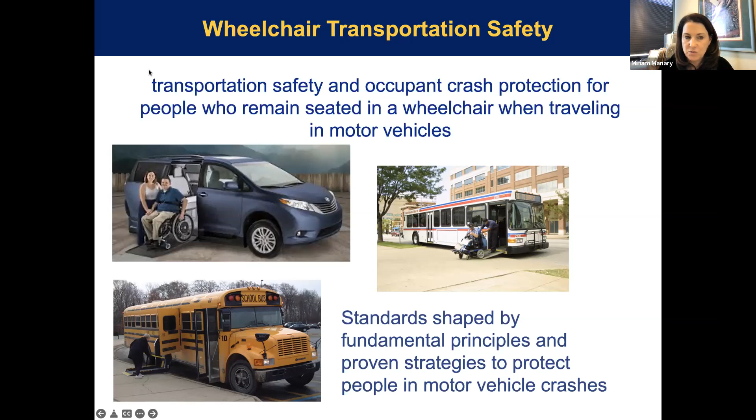When developing these standards, we leaned heavily on the precedents and the principles of conventional automotive safety standards. We looked to the federal motor vehicle safety standards to try to figure out what were the general principles and how can we adapt those to the situation where a person is seated in their wheelchair. So I want to start off by just listing the handful of fundamental principles, so hopefully you can see how they come through in the standards.

One of the main ideas is that when we look at motor vehicle crashes as a whole and the injuries and fatalities that happen as a result of them, the majority of these injuries and fatalities are a result of the occupant contacting something. So either they're contacting the vehicle interior or they've been ejected out of the vehicle and they're contacting an unfriendly surface outside the vehicle, like a tree or the ground. If we can keep people from hitting other objects in the vehicle, we're winning a big part of the game.

A second cause of serious injuries is misused or non-used seatbelts. Obviously non-used seatbelts leads back into the first one, where you're at risk of hitting things. But if you're not positioning the seatbelt appropriately, so it's loading parts of your body that can't take that high restraint force load, this can also be a cause of injury.

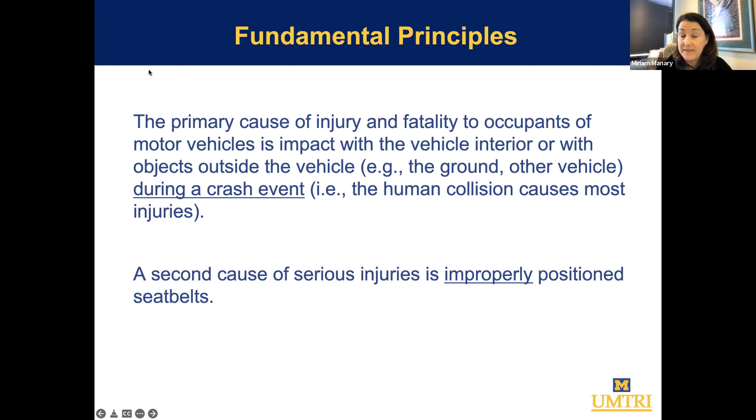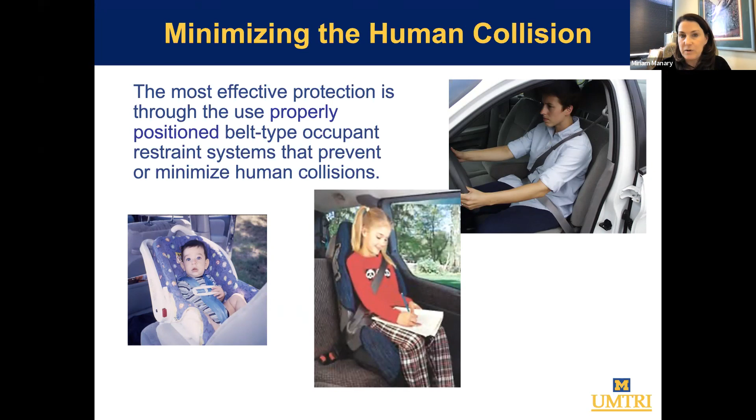So we're all about minimizing the human collision, and it's not a super sexy idea, but the most effective occupant protection system for automobiles is the seatbelt. You can see pictures here of people properly wearing their seatbelt or kids in child safety seats. But this is the sort of protection that really is the best that we have to offer right now, and certainly the level of protection we want to offer all of the occupants of the vehicle.

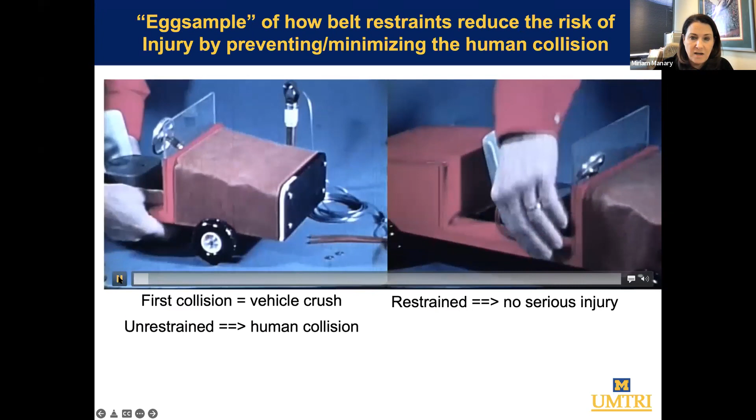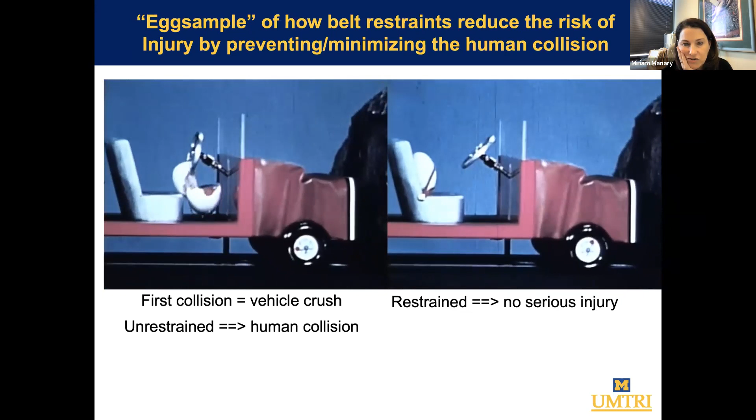This is just a little video that shows the importance of minimizing collision, a simple comparison of these little toy cars. One of them will have an egg wearing a seatbelt and the other has an egg not wearing a seatbelt, and you'll see just that simple little strap keeps the egg from contacting the unfriendly structure and keeps them intact. So a visual to go with that idea of not wanting to hit other things in the vehicle.

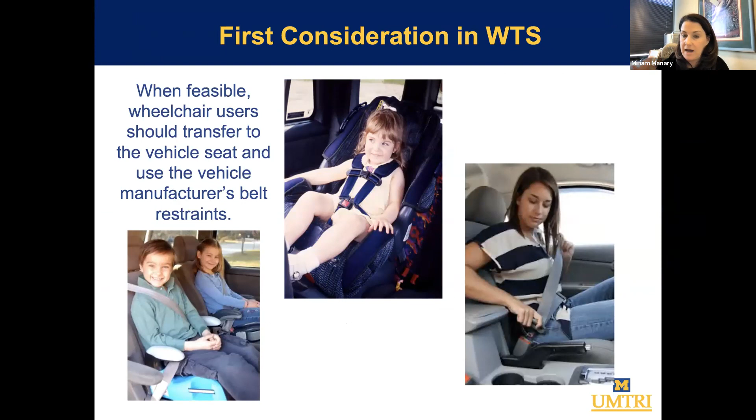That being said, the first choice for people who are in wheelchairs is to transfer to conventional vehicle seating or a child safety seat and use the occupant restraint system offered by the vehicle. But we know that for some wheelchair users, it's just not feasible to transfer, or it's unsafe, or it puts them in a situation where their medical needs can't be met.

So for people who are going to stay in the wheelchair, all of a sudden we want that wheelchair to have a lot of characteristics of a vehicle seat. We want it securely anchored to the floor. We want it not to interfere with our lap and shoulder belt fit. So all of a sudden we're asking the wheelchair to do a whole other set of functions beyond all the great functions that it already does. Both of these goals, having a well-secured wheelchair and having a good fit of the occupant protection system, are much easier to achieve if you have a wheelchair that has been designed for this purpose.

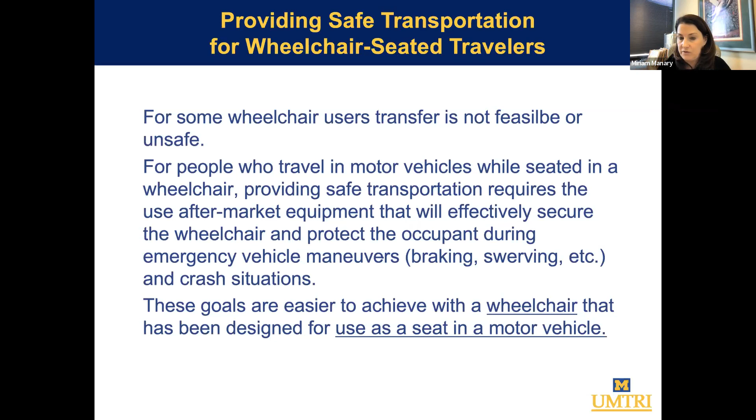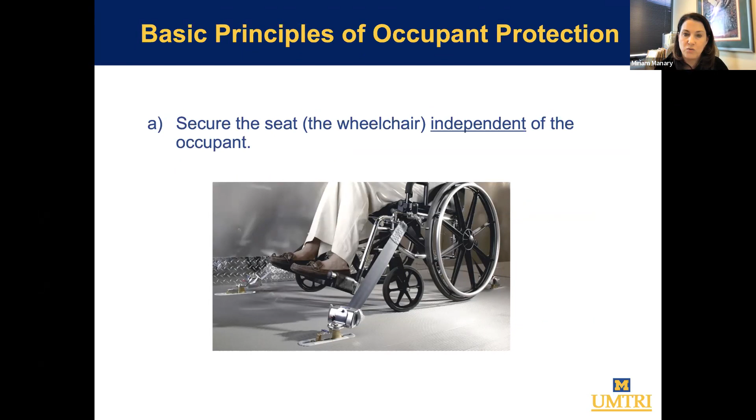So there's 5 basic principles. One is that we want to secure the seat, in this case the wheelchair, independent of the occupant. We don't want the wheelchair to load the occupant and increase crash loading.

We want to orient wheelchairs facing forward in the vehicle, especially in small vehicles. I will talk about the one exception. It used to be very common for people to line or load wheelchairs sideways. That is, none of our crash testing and the way that we know how to protect people is coherent with having people ride side-facing.

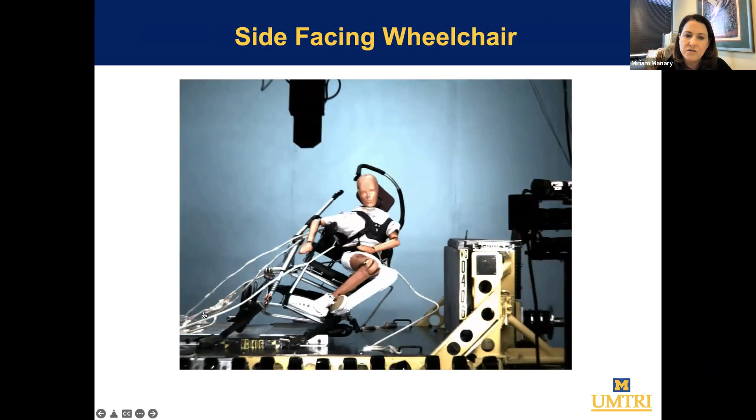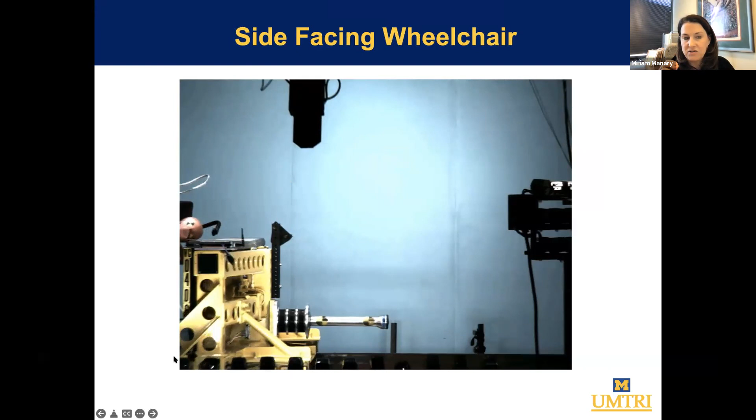Here's a video of a crash test of a side-facing wheelchair. So generally frontal impact sees the highest load. So if you're orienting the wheelchair laterally to that frontal impact, you usually do not see the best strength out of the wheelchair. I'll play this again. You can see there's a flash of light when the impact starts to happen. And particularly because many wheelchairs are designed to fold along the center line, orienting side-facing can be dangerous.

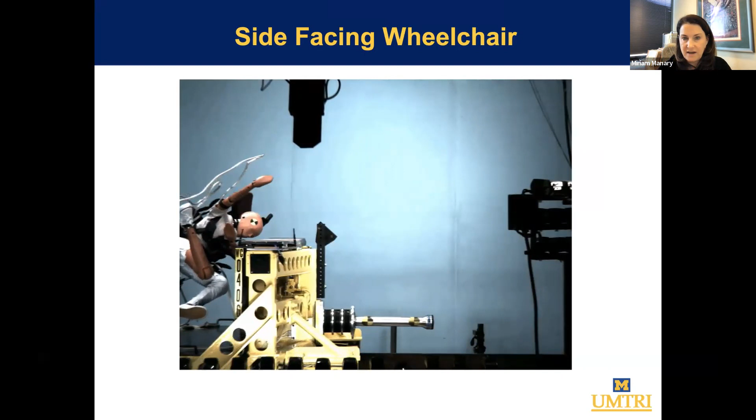Another option would be orienting wheelchairs rear-facing. We know that very small children under the age of 2 are best protected riding rear-facing in their child safety seats. So some people have extrapolated that and tried having people ride rear-facing in small vehicles like minivans. The wheelchairs were just never meant to be loaded in this direction.

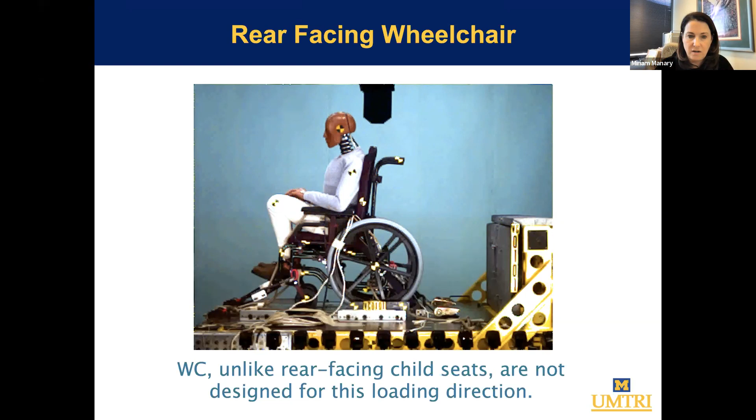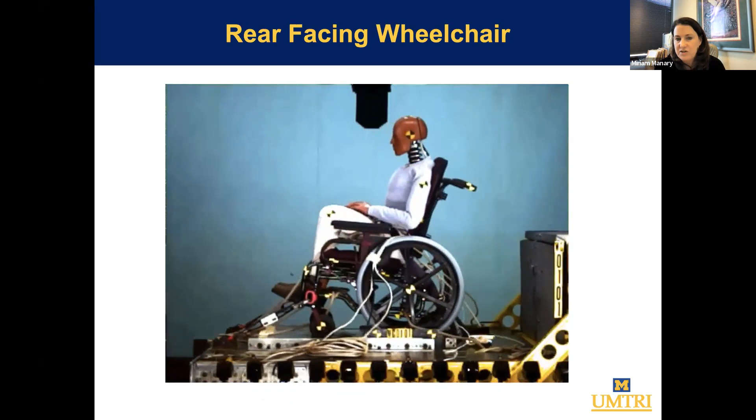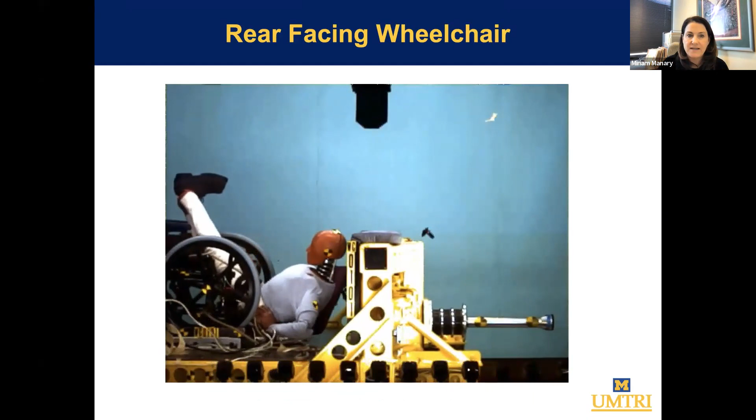So I'll show you what that crash loading looks like. You'll see that when the crash initiates, all of the primary restraint of the occupant, those loads go into the seat back, and it just was never intended to serve this purpose. So hopefully those emphasize the idea that you should be forward facing in your wheelchair in small vehicles.

And then the 3 other things are just properly positioning the webbing-based belt, so the seat belt. We want the seat belt to restrain or protect the upper body and the lower body. Ideal positioning for the shoulder belt would cross the center of the shoulder, the sternum, and then attach to the lap belt over by the hip.

We want the lap belt to be low, touching the pelvic bone and touching the top of the thighs, so that we are applying the restraining forces to skeletal regions of the body that can handle that high load. You never want to have the lap belt up on the soft abdomen where there can be a lot more risk of injury.

And the last one is that when you are anchoring lap belts, you want to make sure you can get a relatively steep angle. This angle I'm talking about is a side view angle, and we want to see it ideally between 45 to 75 degrees relative to vertical.

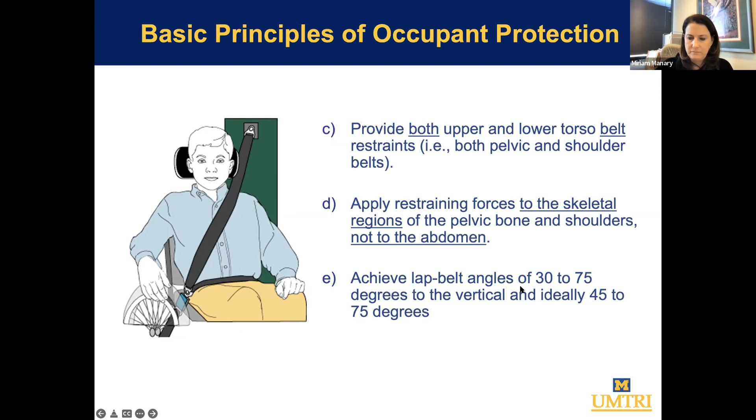So RESNA, this brings us to RESNA Volume 4. There is an absence of government legislation in this area, because the US Department of Transportation has decided they are not going to address the situation where somebody's using their wheelchair as a motor vehicle seat in the federal motor vehicle safety standards. So as an alternative, RESNA developed these voluntary standards that represent the best practices associated with these pieces of hardware. There are 4 standards, grouped relative to what we're testing.

The very first one we developed was WC18, wheelchair tie downs and occupant restraint systems. That's the hardware that secures the wheelchair to the vehicle and provides the lap and shoulder belt, usually, that protects the occupant.

WC19 is about complete wheelchairs that are used as seats in motor vehicles. This has to do with the wheelchair itself, how it responds to load, and the features it has to make it compatible with motor vehicle travel.

WC20 is a standard for wheelchair seating, specialized seating that comes from a third party—someone who makes seating but does not make the frame it goes on, seating that can go on a variety of frames. That's the focus of WC20.

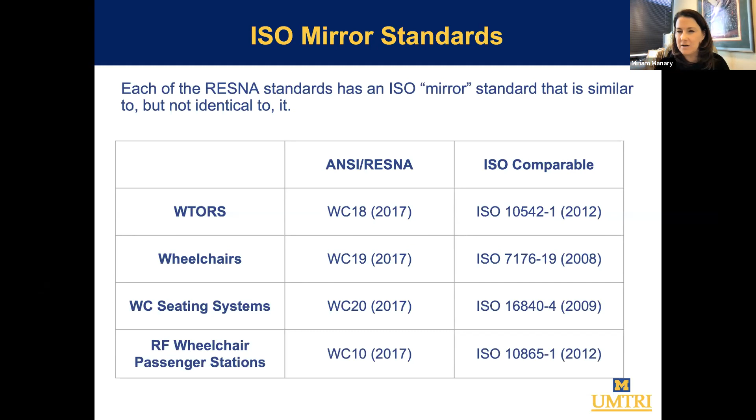These sets of standards are similar in intent, they're similar in content, they aren't exactly the same. So there are some important differences. And as I go through this, I'll call out some of the ones that are most salient.

All right, so I'm going to start with WC18. WC18 is a standard that deals with wheelchair tie downs and occupant restraint systems. And what does the standard require?

Well, the WTORS that meets WC18 must have independent securement of the wheelchair. So the wheelchair is not secured through, or by loading, the occupant. It has to provide both upper and lower protection, lower torso and upper body protection, to keep people from hitting their heads, from having those adverse contacts.

And it has to be crash tested, using a crash test protocol similar to the one we use for testing child safety seats. So it's a delta V of 30 miles per hour and a 20 G environment that can be up to 26 Gs in the peak.

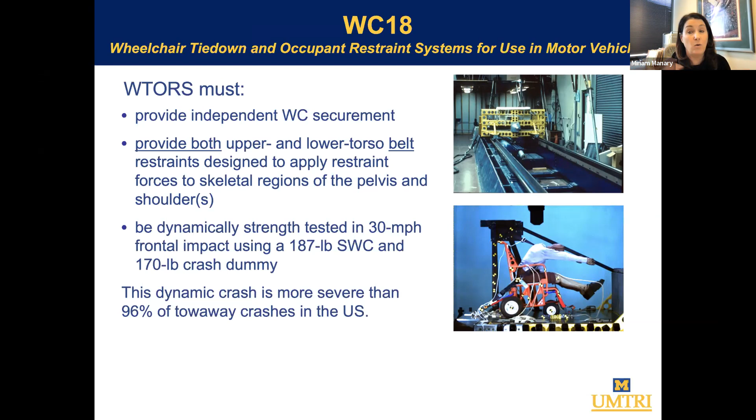So if you take all the crashes, presumably the towaway crashes, meaning crashes where the vehicles could not be driven away from the scene, are more severe than fender bender type crashes. It really covers 96% or more of crashes in the United States.

Right now we have several styles of WTORS that comply with WC18. This 4-point strap type is probably the most common. It's called 4-point strap type because it's very descriptive: there are 4 straps that connect to 4 points on the wheelchair and 4 reinforced points on the floor.

But there are also docking systems. This is one of the more common ones, where there's a pin hanging down that's captured by a device on the floor. This sort of device is usually, actually always, intended for a private vehicle where they know exactly which wheelchair will be riding in that vehicle, and the wheelchair and the dock need to be specifically tuned to work together. So this is a bespoke or tailored solution for a particular person riding in their own vehicle, and they can dock using this system that's been tuned to their wheelchair.

If someone else with a different wheelchair gets on, they can't use the same docking system. Whereas the 4-point strap type tie down is very versatile.

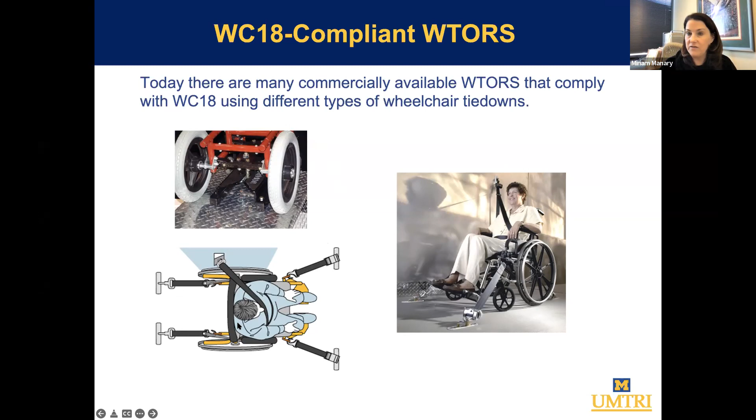WC18 differs from its mirror standard in ISO 10542 in a few key ways. Probably the most important one is that you're required in WC18 to pass the test where the lap belt is anchored to the surrogate wheelchair. And what this does is deliver higher loads to the rear tie downs, so there's a higher strength requirement for the rear tie downs.

There's also additional requirements for the reconfigurability of the shoulder lap belt so that we can have more options for routing it effectively around wheelchair features, so that we can make sure that we get that great fit of the lap belt low on the pelvis touching the top of the thigh, and the shoulder belt coming from the shoulder across the sternum to the opposite hip.

I did also want to mention there is another standard from the Society of Automotive Engineers called J2249, and this is an older version of WC18. When we improved on 2249 and made WC18, we just figured everyone would be on the bandwagon and they'd all just start using WC18. But what's really happening is that people see there are 2 US-based WTOR standards, and it causes a lot of confusion. Which one should they be complying with?

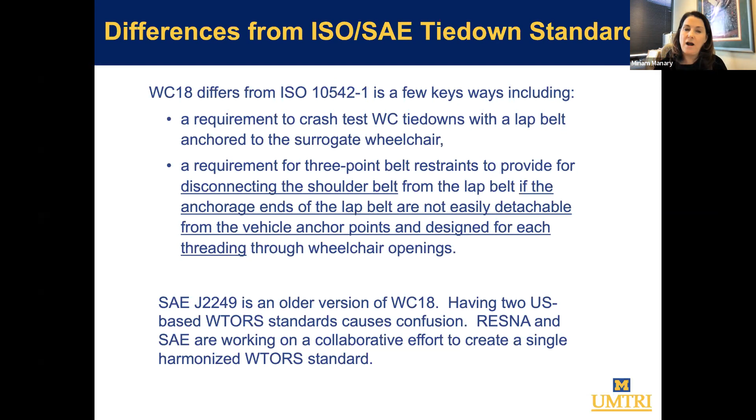So just in the past 6 months, RESNA and the Society of Automotive Engineers have agreed to make a collaborative effort, and we're going to revise WC18 and make it a single harmonized standard that exists in both the SAE world and the RESNA world, hopefully to reduce confusion and make sure that all of our products are meeting the same level of safety.

I wanted to talk a little bit - this will be another reoccurring theme - about having a seatbelt system with more reconfigurability and more disconnecting and reconnecting parts, which can really help with routing the belt to the pelvis. So this is a picture that shows you one particular situation where there isn't really a great way to route the belt.

You can go on the outside and through the hole of this armrest, but then you might be displacing the shoulder belt. You could go over the top of the armrest, but then you might be routing the belt too high. So having these requirements for disconnecting parts that can be reconfigured means that we can have a pelvic belt that goes correctly on the pelvis and then goes through the gap between the seat back and the cushion to get optimal fit.

So that's one of the differences between WC18 and ISO. A system like this can meet ISO, but ISO does not require all those different levels of reconfigurability.

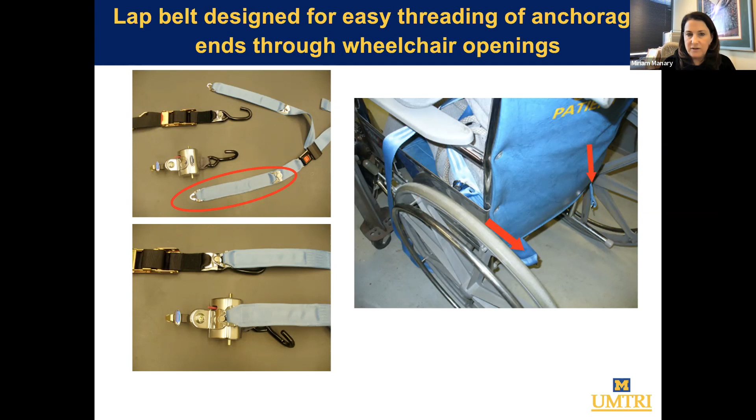All right, so that's all I have on WC18. So I'm going to move on to WC19. WC19 is our standard for wheelchairs that are used as seats in motor vehicles. So someone is sitting in the wheelchair, and all of a sudden this wheelchair that's designed to roll and fold and meet all these other needs is now supposed to be that very stable, secure seating point in a vehicle.

So in order to meet the standard, the wheelchair has to have 4 easily accessible securement points so that it's compatible with strap type tie-down systems. It has to offer the option of - so it doesn't necessarily always need to be used with, but it has to at least offer the option of - a wheelchair anchored lap belt. Later in this presentation, I'm going to go over why exactly we're trying to get people to consider a wheelchair anchored lap belt.

Again, we're using a crashworthiness test, a frontal crash test. Frontal crashes are the most severe and also account for the highest numbers of injuries and fatalities right now in our current vehicle fleet. So we're testing for crashworthiness, again, using that 96th percentile crash event.

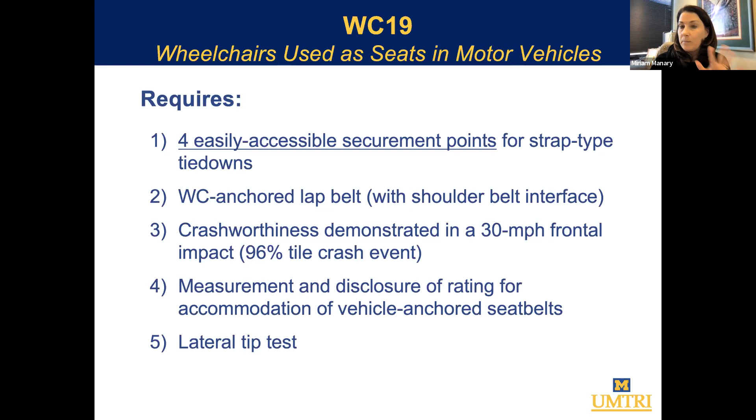A couple other things - we have so much trouble with seatbelt fit and ease of fit and quality of fit that we also have some annexes that specifically address how easy it is to adjust and use a vehicle anchored seatbelt. And there's also a lateral tip test. So for these things - well, actually for the first four, I don't think I have a picture of the lateral tip test - I just wanted to give you a glimpse into what a compliant wheelchair might look like.

So this first one, 4 easily accessible securement points. They have a defined geometry, and this size and shape is meant to be able to accommodate a standard hook, or there are still some tie-down systems where you must bring webbing up from the floor and thread it through a portion of the frame. So this is also large enough that you can thread webbing, that seatbelt fabric, through it and clip down. It's also not so big that you have situations where the hook interface is going to easily disconnect. So we don't want to have that either.

So there's usually 4 securement points, 2 on the front and 2 on the back. With very heavy wheelchairs, sometimes there's 2 extra added on the back, so there's 4 on the back and 2 on the front.

They have to be easy to use for transportation providers. We've heard that they want it to be quick and easy. So you must be able to comply with the standard: you have to be able to hook to each of these securement points in 10 seconds or less.

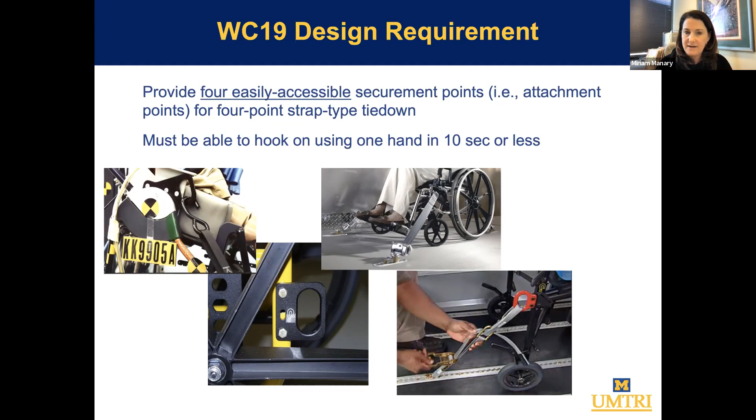I just wanted to emphasize that 4-point strap type tie downs are emphasized in our standards, because they're the most common type of wheelchair securement system used. They're particularly effective in public transportation, where one wheelchair station has to accommodate a wide range of wheelchair types, or a school bus that has to accommodate a wide range of wheelchair types. A 4-point strap type tie down, the same tie down can be used on many different wheelchairs. They also are just very effective at what they're trying to do.

They provide protection not only in the frontal crash that we test them to, but we see in the field that in side impact and rear impact crashes, this 4-point strap type tie down, just because you have basically the 4 corners of the wheelchair tied down, do a great job of securing it.

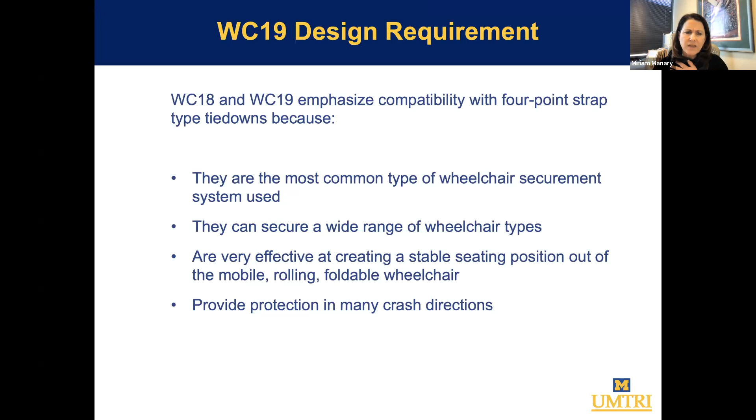I had another thing to say and it left, but maybe I'll think of it later.

Another thing that WC19 requires is for the very smallest wheelchair occupants, so occupants 50 pounds and under, we require there to be, instead of focusing on a 3-point belt, these wheelchairs need to have an integrated crashworthy 5-point harness. When we first started with the standards, we thought that kids under 50 pounds would just transfer to child safety seats or booster seats, and we felt like we didn't really need to cover this segment.

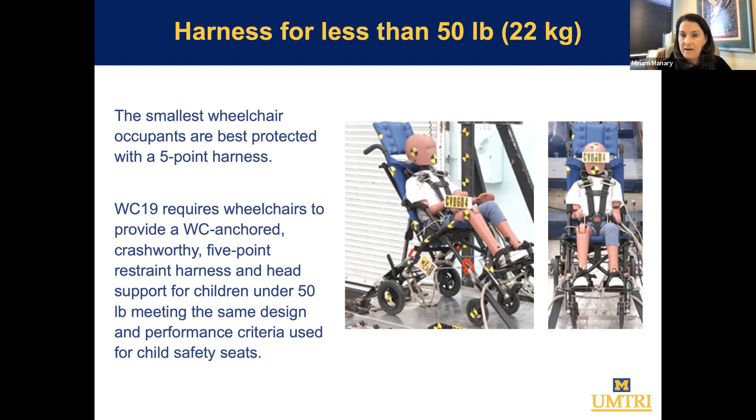But what we really found is that kids were being prescribed and were using wheelchairs in this range of 15 to 22 kilograms, and that they weren't transferring, and we needed to have crashworthy options for them. So we developed the requirements for the 5-point harness and a long supportive back, basically drawing directly from the child safety seat standards, FMVSS 213, to make sure that we're affording these kids a similar level of safety as they would get if they were sitting in a child safety seat or car seat.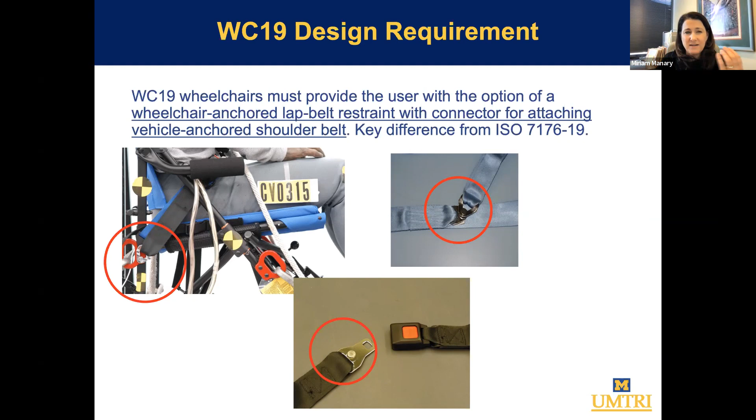There's a lot of emphasis in 18 and 19 on a wheelchair anchored lap belt. I wanted to go through why we push this so hard. We haven't had great success necessarily in getting this to happen in the real world, but we think it's important to have it as an option. I wanted to go through some of those reasons.

First of all, we have all sorts of problems in the field with poor lap belt fit. In some situations, people are going in front of the armrests - you can see that this belt is nowhere near the pelvic area, it's not touching that bony surface. There are issues with going over the armrest where the belt will cross high on the soft abdomen. Whereas if we have a tailored wheelchair anchored lap belt, we can get the perfect fit that we're looking for with the lap belt.

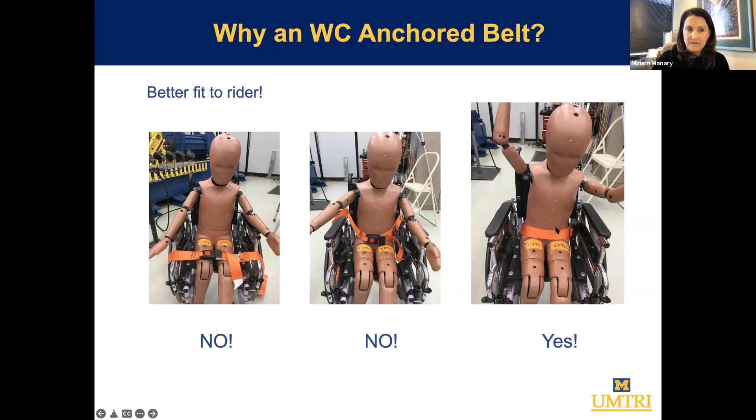Another reason is that it can create a situation where you have less intrusion of your personal space by the transportation provider. So if you are getting on a bus and someone has to come back and help you with the 4-point tie down and applying the belt, most people are not comfortable with a stranger coming and routing a belt around their pelvis. It's your personal space and it can make you uncomfortable.

Also, it makes the whole time to secure the wheelchair and get ready to go less, so it reduces that dwell time of the vehicle, and it helps with getting that good fit. Hopefully reducing the dwell time also means there's less stigma for the wheelchair user if there are other people in the vehicle.

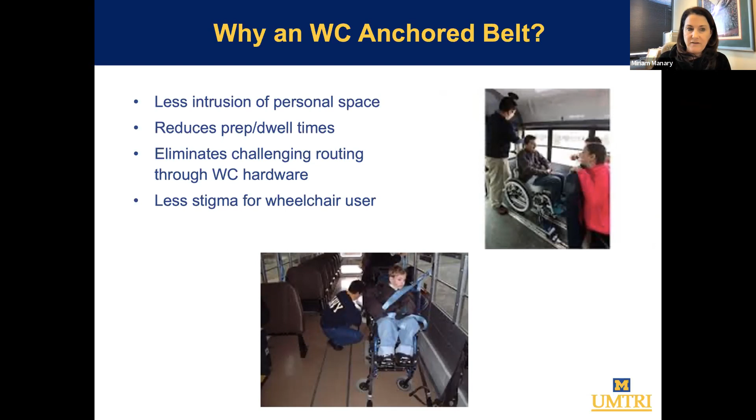Another reason why we are really excited about a wheelchair anchored lap belt is that we have a lot of pretty alarming data about misuse and non-use of seatbelts in the field.

First I want to talk about these two photos. These were some volunteers who came in with their own customized vans and showed us how they get in and out of the van, how they secure their wheelchair, and how they use the seatbelt. This person is taking the shoulder belt and looping it around the cane, then back down to the floor. But the cane's not strong enough for this application. We have the belt crossing that person's vulnerable internal organs, the liver, and this wouldn't be optimal protection in a crash.

Another one of our volunteers wrapped the shoulder belt around the armrest. Again, she's getting not terrible fit, but it's not going to perform. This isn't a strong anchor point, so it's not going to perform as needed in a crash.

Independence is really important, and these people are doing the best that they can. But we need better solutions that are easier to use so that they can achieve proper use of and good protection from the seatbelt. This graphic shows a study of about 66 or 70 field incidents where people in wheelchairs were injured or experienced a crash event, and maybe weren't injured.

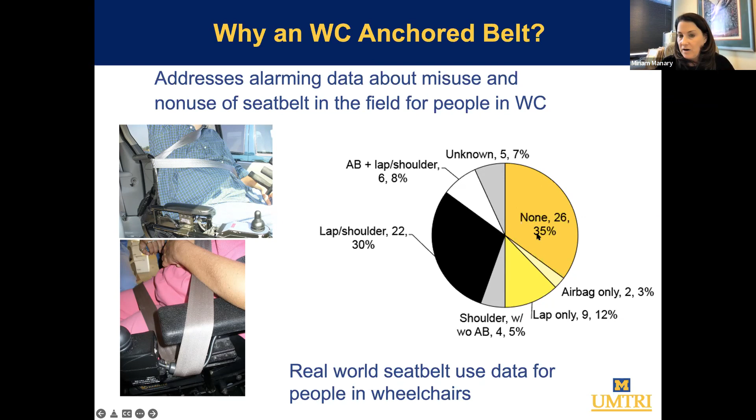We have a few using airbag only, which airbags are supposed to supplement the seatbelt, and this isn't... The good categories here are lap and shoulder belt at 30%, and airbag plus lap and shoulder belt. So we'd say less than 40% of the people that we're seeing in the field in these dangerous situations are able to use the lap and shoulder belt to protect themselves. There's a large percentage of people who are either under restrained or not restrained at all.

The last reason for the emphasis on wheelchair anchored lap belts is that there's a lot of confusion between belts on wheelchairs that are only meant to provide postural support and those meant to provide crash protection. In some ways it's understandable—some of this hardware looks a lot like a crashworthy seatbelt, these are components that look like things I see in child safety seats. But this belt was only meant for postural support and was never meant to protect you in a crash. People are assuming that it can provide protection and not using the crashworthy seatbelt.

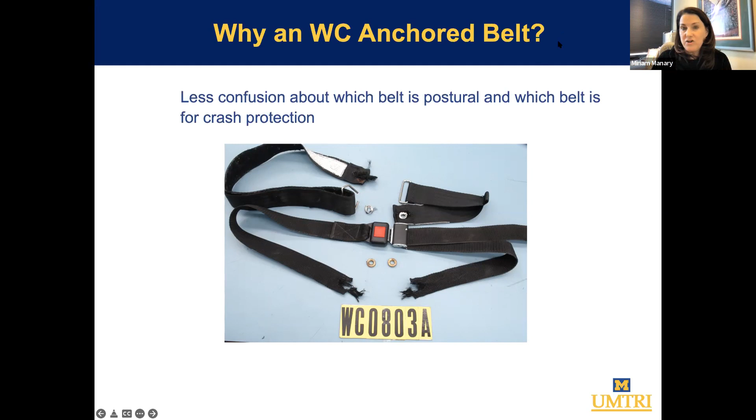So again, having a customized wheelchair anchored seatbelt could reduce this confusion as well.

Still on WC19, I wanted to show you, we use this crash test to determine the strength of the wheelchair, the securement points, the belt restraints. We were looking to make sure that the seat is supportive of the occupant—we don't want to see downward collapse or seat back over-recline. We want to make sure that all the pieces and parts are staying together and not flying around.

Here's an example of a good performing power wheelchair. See the occupant—it's a significant crash, but the wheelchair is staying in place and the occupant is staying in the seat. Here's an example of a folding stroller type wheelchair.

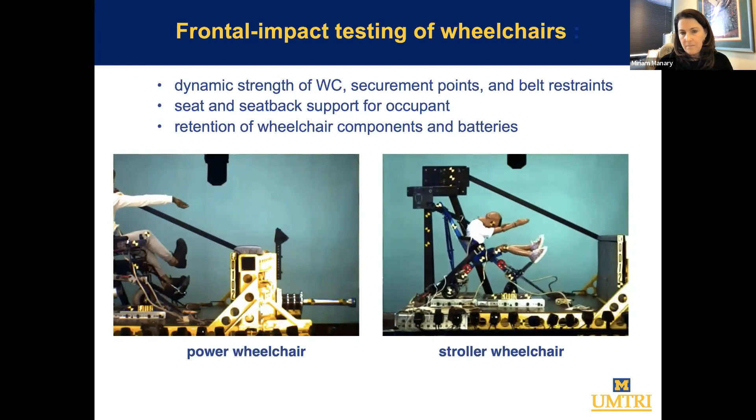Just to give a little more detail, for WC19 we want to make sure that anything detaching from the wheelchair is either very light or soft and not rigid. So anything that detaches has to be less than 150 grams—about the weight of a bar of soap. You can see this piece came off one of the wheelchairs; it's almost a kilogram, about 2.2 pounds. You wouldn't want this flying around the occupant area, hitting other occupants, hitting the occupant in the wheelchair.

There's also a requirement in WC19 that we can't have any sharp edges that are either near occupants or near belts. Seatbelts are made out of this webbing, which is really strong—as strong as steel—but if it gets cut, the strength rapidly reduces. So we want to make sure that everything that's going to come in contact with either an occupant or the belt system is nice and smooth and not going to cause a problem for the wheelchair user or for anyone else.

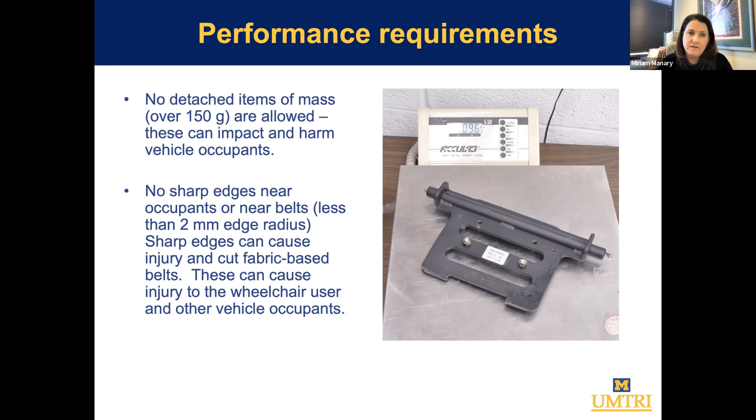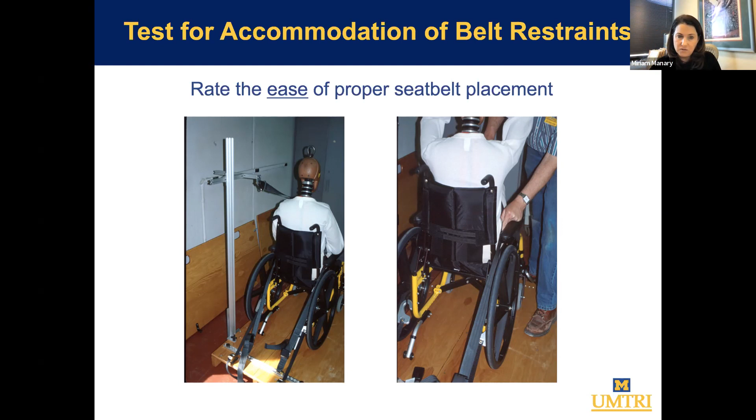There's huge issues with getting good use of the seatbelt. One of the requirements for WC19, since most people don't choose a wheelchair-anchored belt and instead use a seatbelt anchored to the vehicle, is that we rate how easy it is to use this type of belt. How narrow is the gap I need to thread the belt through? Can I actually insert the belt into a slot? That's easier than having to thread an end through a closed aperture. In addition to the ease of putting it on, we rate the actual resulting belt fit.

Is the belt low, touching the top of the thighs, crossing from shoulder to hip across the sternum? In WC19, we give each of these a rating, and to comply with the standard, the wheelchair has to achieve at least an acceptable rating in each, for both ease and fit.

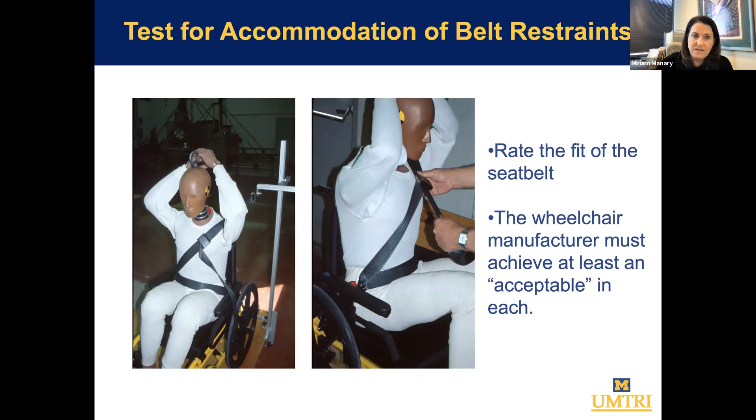The other thing I wanted to mention is that both WC18 and 19 contain specifications for the universal docking interface geometry. This is a definition of an interface shape located in a rough location on the back of the chair, with diameters and vertical requirements for this shape that attaches to the structure of the wheelchair and can be used to secure it. There was a lot of research done trying to figure out a location that would work on a wide range of wheelchairs. This is also compatible with electric vehicles where you can't anchor to the floor.

You could envision something like a flip-up seat that has a UDIG interface where you can secure your wheelchair. This has been around for a long time and developed — an initial version was developed at Oregon State, and then it was advanced significantly by work done in Pittsburgh. It hadn't really achieved any practical use; we didn't have wheelchairs or WTORS systems that were using this geometry.

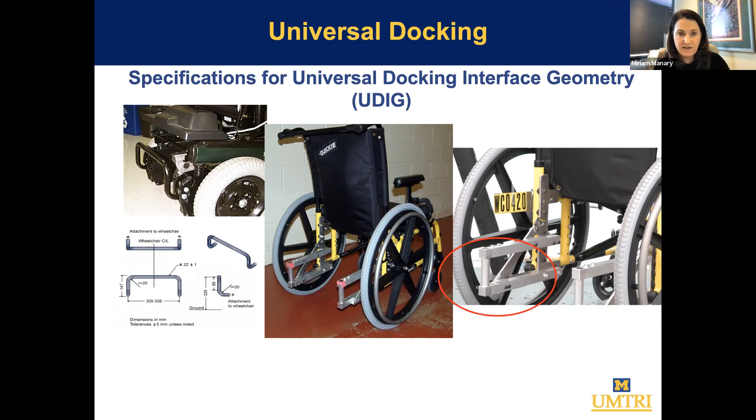However, with the promise of automated, autonomous and driverless vehicles — where we'd like to see an autonomous vehicle show up at a wheelchair user's house and have them secure themselves without a third party attaching straps — this is seeing revived interest. So I wanted to make everyone aware that this is part of our standards, even though it isn't seeing wide use.

All right, so we went through two of our standards, now we're on the third one, WC20. This standard recognizes that not all wheelchairs come from one manufacturer. Many wheelchairs involve a prescriber matching specialized seating from one manufacturer with a frame from a second manufacturer, then combining them to make a complete wheelchair.

For a while, people were testing every combination — if I make seating and know it goes mostly on six frames, I'd test all of those combinations, which is costly and wasteful. So there's a better way to do it. WC20 allows specialized seating to be tested on a surrogate frame in a worst-case way to assess its suitability.

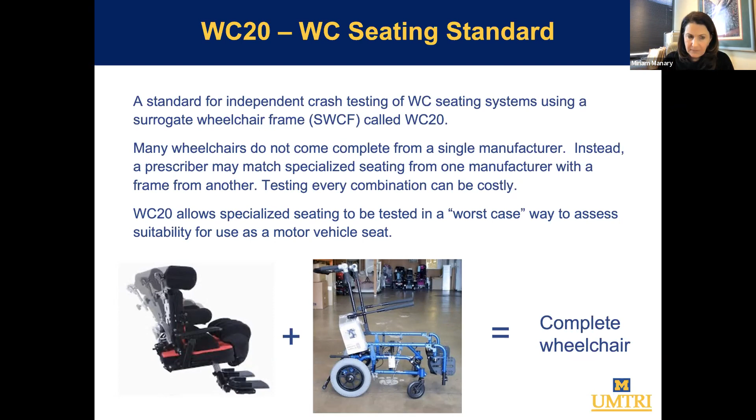So what does this look like? The intent is that a seating system that meets WC20 can be paired with a base frame that meets WC19 to create a crashworthy wheelchair.

The surrogate base frame is made out of steel and comes in many different widths — we adjust the width from 12 inches to 22 inches by reconfiguring some of the internal center crossbar parts. The surrogate wheelchair frame has deformable elements because we want to emulate typical deformations in the wheelchairs we validated it against. There are deformable caster elements that bend, and deformable elements at the base of the canes that bend, and we replace those before each test.

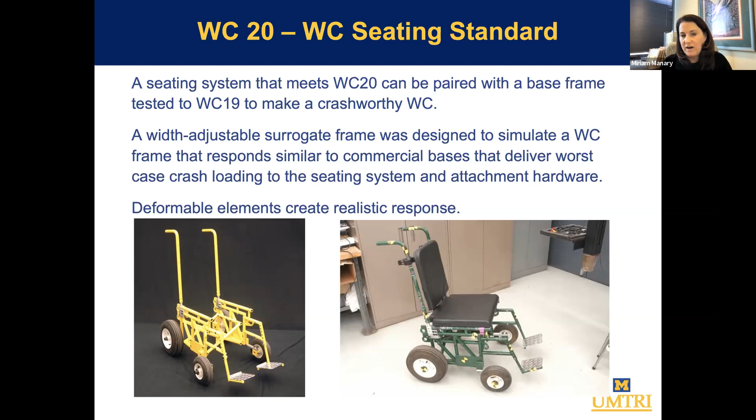This creates a more realistic response, but we want this sort of worst-case crash loading to make sure that whatever frame you put it on, the seating will perform well.

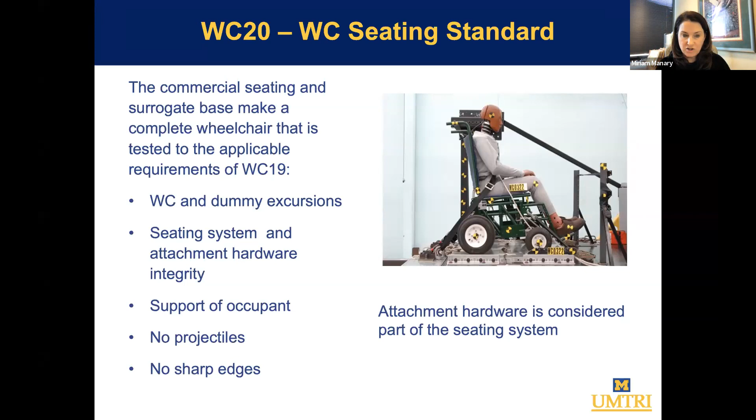So once we pair the commercial seating with the surrogate frame, we basically run a WC19 test, and we look at the wheelchair excursions, the dummy excursions, and the integrity of the seating system. Do we have cracking? Does the hardware attaching the seating to the frame, which we consider part of the seating system, stay attached at all the different securement points? Does the seating system support the occupant appropriately? Does it keep them in an upright position and prevent downward collapse? And again, we look for no projectiles and no sharp edges.

And then finally, the 4th section of volume 4, RESNA volume 4, is WC10. As I mentioned before, this is kind of a different breed because we're talking about a different crash environment. WC10 is specifically intended for application in large accessible transit vehicles. Think city bus, think rapid transit cars. And this environment allows a wider range of solutions because it's very unlikely to see a high severity crash.

I want to show you this graph here of million miles of vehicle travel versus the average incidence of a crash, categorized by greater than 5 miles an hour, greater than 8, greater than 10, and greater than 20 miles an hour. The transit bus, in red, will on average travel 455 million miles before it sees a 20 mile an hour crash event. In comparison, most of the yellow bars are so small you can't even see them, but for the over-20-mile-per-hour category, the passenger vehicle, meaning the sedan or minivan, will travel 7.2 million miles. So there's a factor of 64 between those two things. This large accessible transit vehicle is just much less likely to get into a high severity crash.

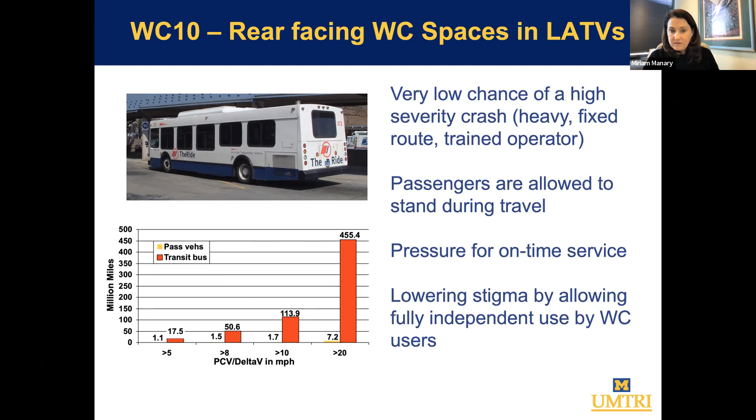Reflecting this, passengers are often allowed to stand during travel, and there's pressure for on-time service. The best situation is that people in wheelchairs can be fully independent getting on, boarding and alighting the vehicle, and riding in it. And the 4-point strap type system isn't a fully independent system. So the idea, and I'm sure you've seen these, is that there's a rear-facing station that usually has a backrest and a network of grab handles that you can stabilize yourself with. This rear-facing wheelchair passenger station is what WC10 is concerned with.

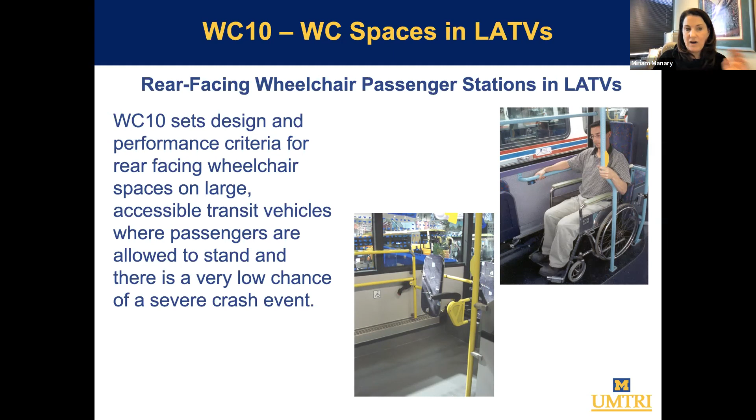So it sets performance criteria for these, and because we know that the likelihood of crash is so low, it doesn't have to involve a crash test like we have in the other 3 standards.

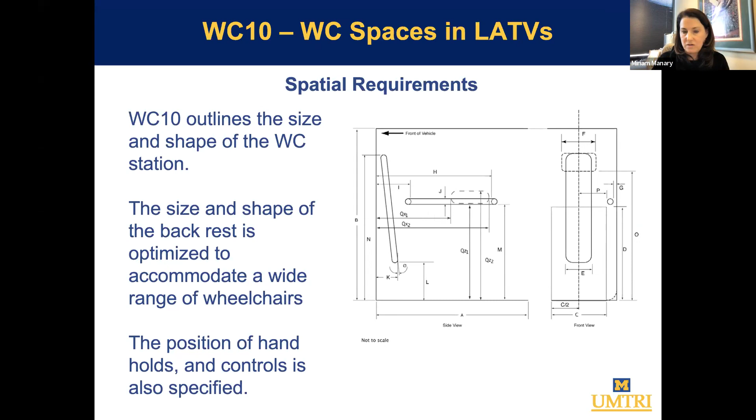The position of the hand controls is also specified, hand grab handles, and then things like stop request controls. Those locations are also covered by WC10.

I mentioned that we aren't expecting to see any high severity crashes, but we are expecting to see emergency braking, rapid turning, emergency vehicle maneuvers. To address this, WC10 has these quasi-static pulls in various directions. You pull forward, rearward, and to both sides, which allows you to assess the containment of the wheelchair and occupant and the lateral stability, since tip-overs and falling out of the wheelchair are things we see often in this environment.

Before I wrap it up and we take some questions, I just wanted to alert people to different resources.

So there's the Ride Safe brochure. This is a hard copy and PDF type brochure that outlines best practice for wheelchair transportation safety and can be really helpful in communicating to consumers what they should be asking for and advocating for safe travel. It comes in Spanish, French, and English.

We also host a wheelchair transportation safety website, which has a not-so-friendly URL because of reasons at the University of Michigan. But some of the cool things you'll find there is basic information about the wheelchair standards, a bunch of downloadable crash test videos that demonstrate the importance of best practice by looking at the outcomes of different sorts of misuse, lists of technical and consumer publications, and frequently asked questions with answers.

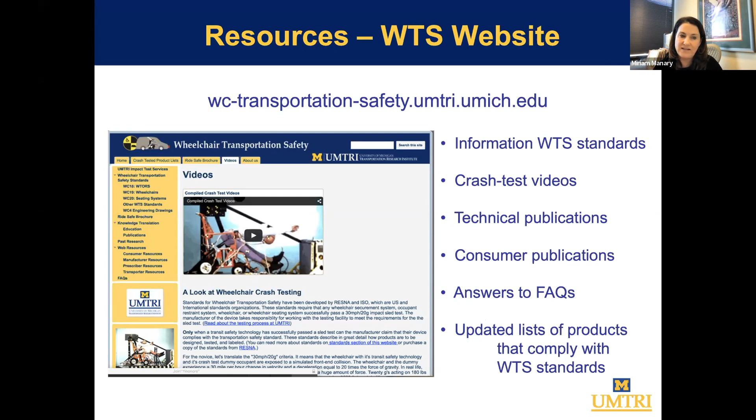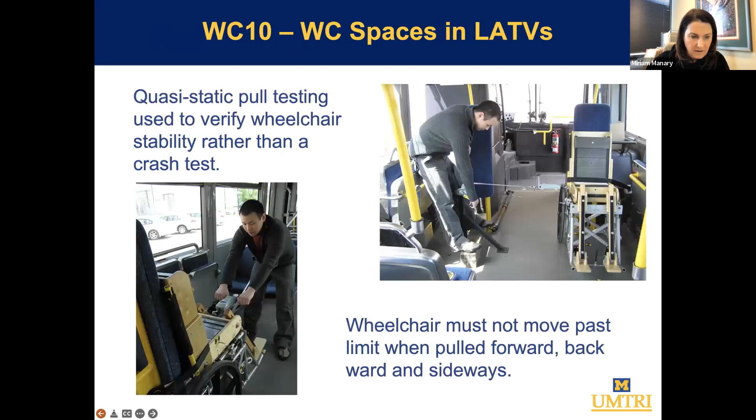All right, well, questions are slowing down. Let's see, any recommendations for securing power wheelchairs that have more sideways movement of seat during transportation due to elevation systems? Oh, like might have a lift component or a suspension component.

So in general, when we see systems like that meet WC19, those are usually the situations where either the securement points are up on the seating so that you're stabilizing the part of the wheelchair that's closest to the occupant, or several of them fall into that category where there are four securement points: on the back of the chair, two on the seating and two on the base. And that does produce good performance. So I think the key to achieving good performance there really is making sure that you're controlling the seat as well as the base.